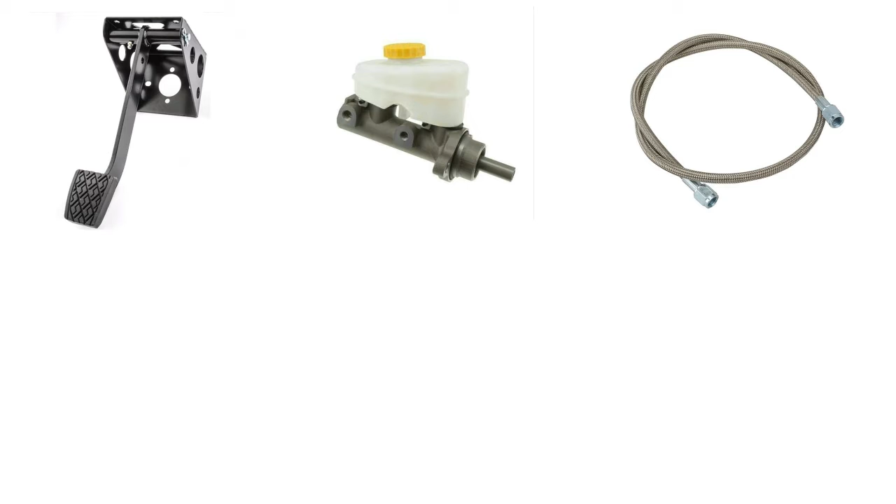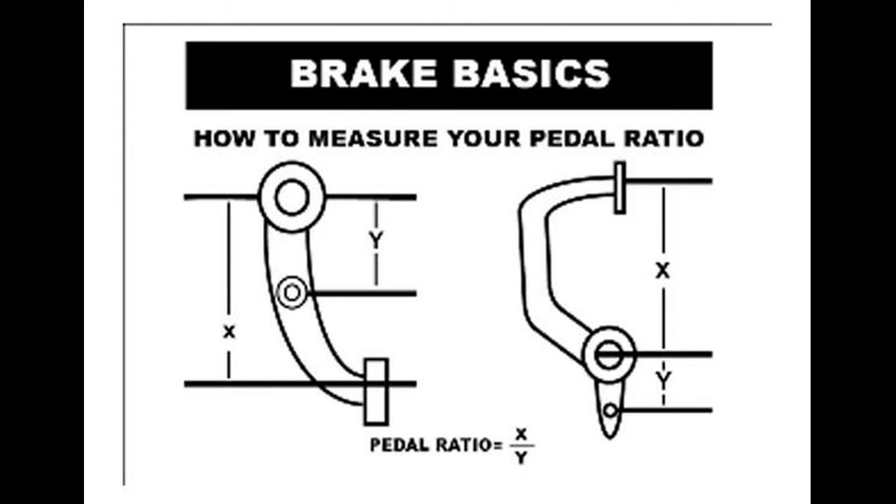Let's first talk about how braking is achieved. The system consists of the brake pedal, master cylinder, brake hose, rotor and the caliper. The brake pedal is the input to the braking system. The driver applies force on the pedal which is then amplified using the pedal ratio, and it is a very important design factor for the pedal as it multiplies the force applied on it.

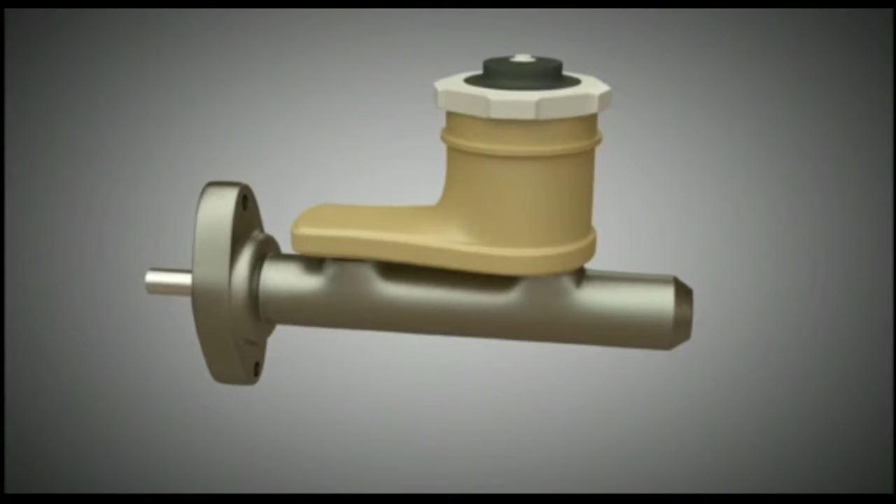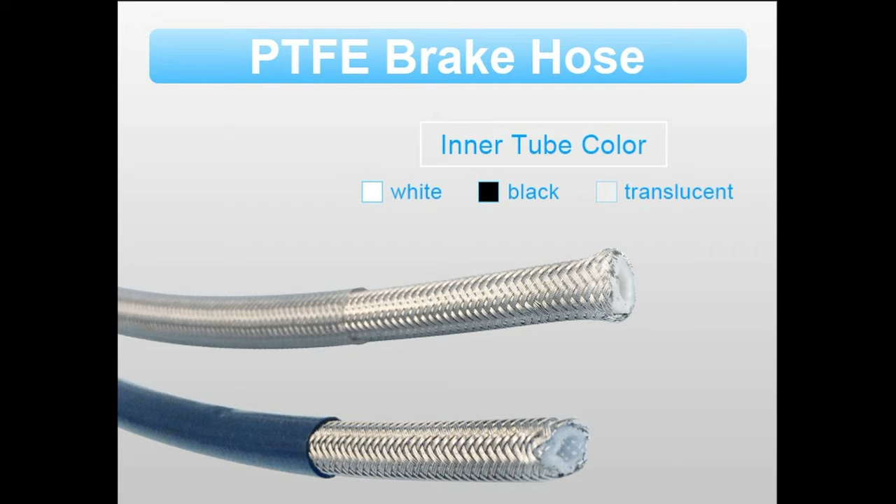Do you see the small cylinder connected to the pedal? It is the master cylinder which converts the foot force to hydraulic pressure. The master cylinder is topped by the brake fluid reservoir. This hydraulic pressure is carried by a brake hose, a tube specially designed to sustain high pressure and sudden increase in temperature. Then, this pressure should again be converted into force to stop the vehicle.

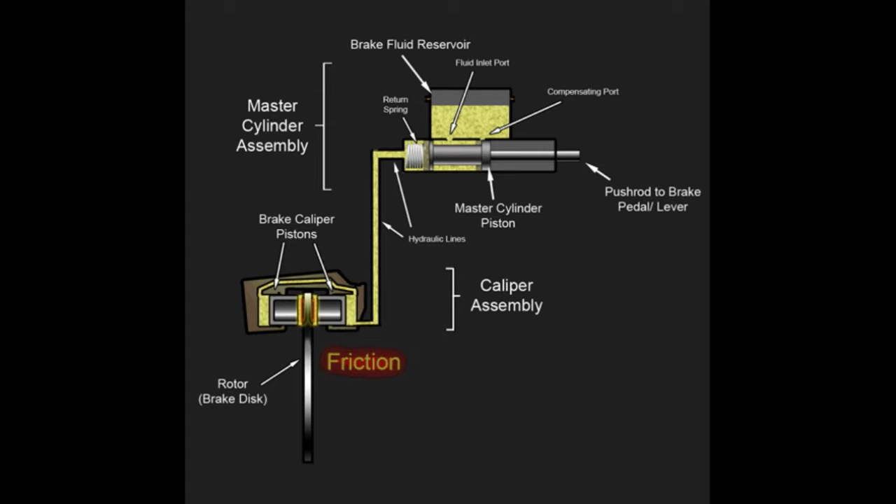Who does this? The brake caliper. The pressure from the brake hose pushes the piston in the caliper. There are two main types of calipers, floating and fixed. And next is the brake disc, which is fixed with the help of the brake hub, which rotates with the wheels of the vehicle, and thus the retardation of the disc will ultimately result in retarding of the vehicle.

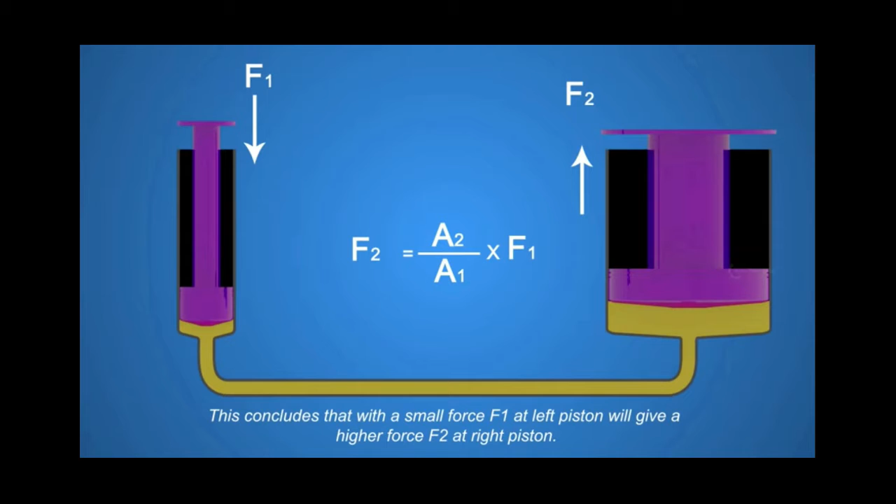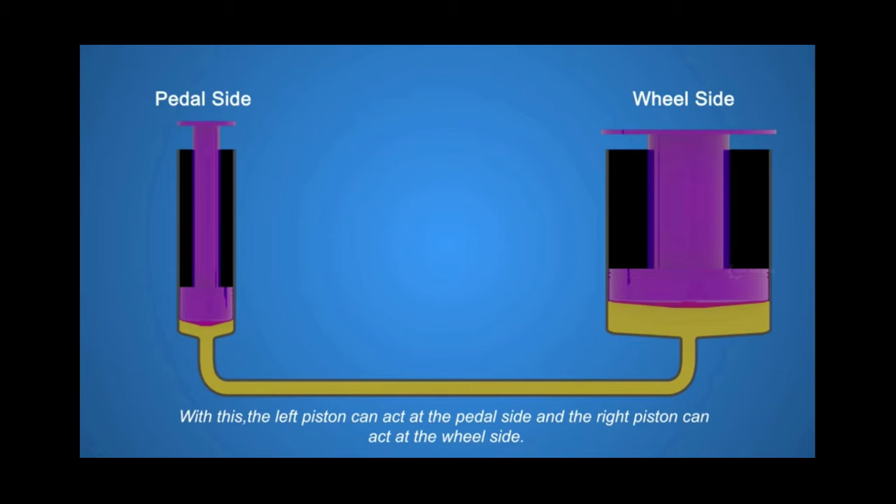So how do you think this comparatively small brake pedal force converts to a very large force which is enough to stop the vehicle? The answer is Pascal's law. The pressure remains constant in the brake system. Let's consider the left hand side to be the master cylinder and the right hand side to be the caliper piston. The force applied to the smaller area of the master cylinder creates a larger pressure which goes to the other end to the caliper piston, making the brake pad stop the brake disc.

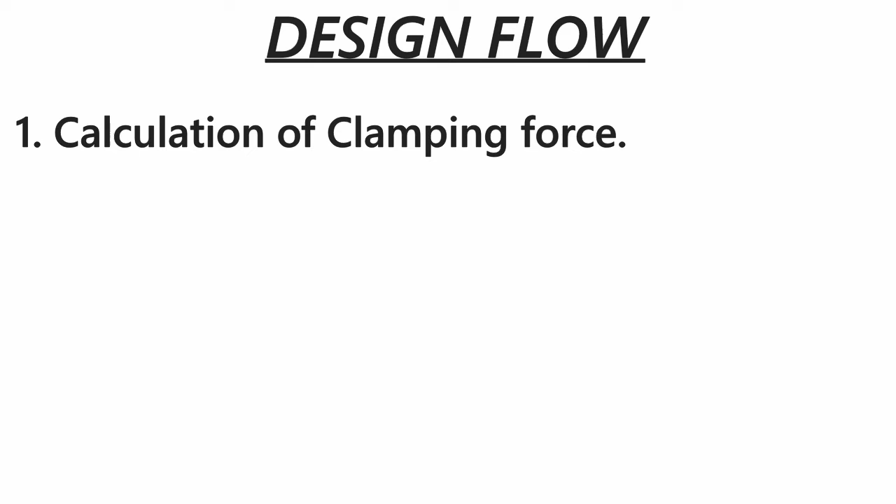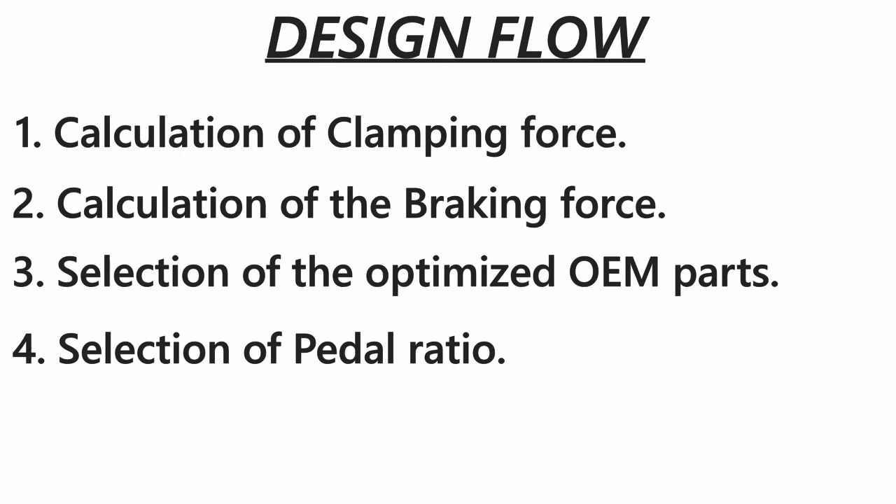The design flow for the brake system is a stepwise process. First, calculation of clamping force. Second, calculation of the braking force. Third, the selection of the optimized OEM parts. Fourth, selection of the pedal ratio. And last but not the least, design analysis and manufacturing of the parts.

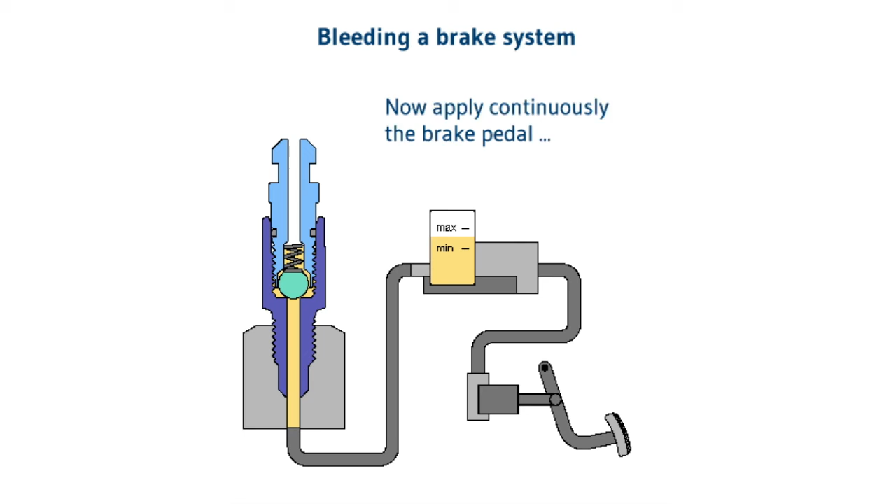And after the installation of brakes, there is a step to ensure proper functioning of the system, that is bleeding, which is the process of removal of air bubbles from the system.

Now I hope this video might have helped you to understand more about brakes, and now you can actually tell how exactly the brake works.